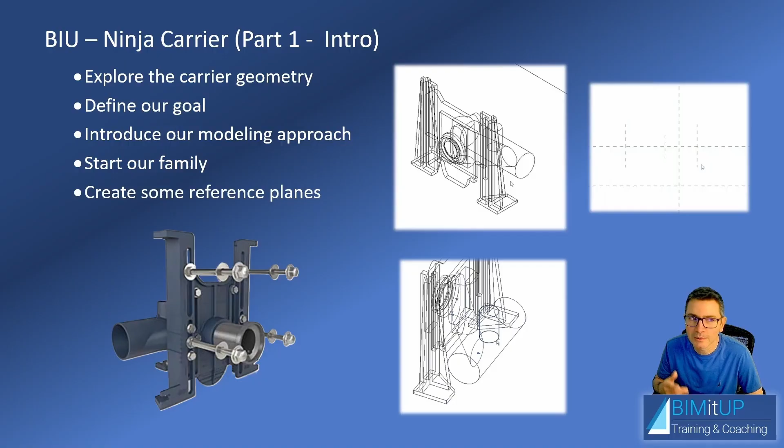This is the Ninja Carrier Part 1. So what are we going to do here? We're going to first explore the geometry of the carrier, then we're going to define our goal. What do we want from our carrier? Spoiler alert, we want it to be smart and practical. Then we're going to introduce our modeling approach. We're going to start our family, and as always, how do we start our family? By creating some reference planes. So see you in Revit.

Okay, so if you Google Zurn 1201 carrier, this is what you get. And this is what I'm going to use for my example. That's a single-handed carrier. I'm going to also do the back-to-back, but I'm going to start with this one because it's easier. So if you download this and load it into a project, you're going to get something like this, right? So you can see this carrier has a pretty complex geometry. So let's study it a little bit.

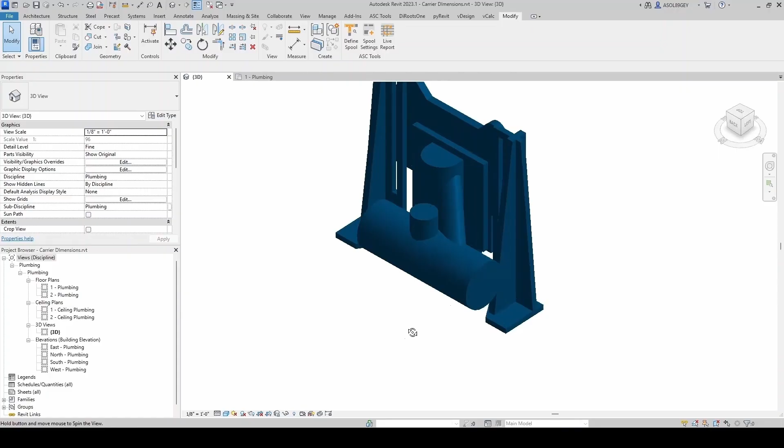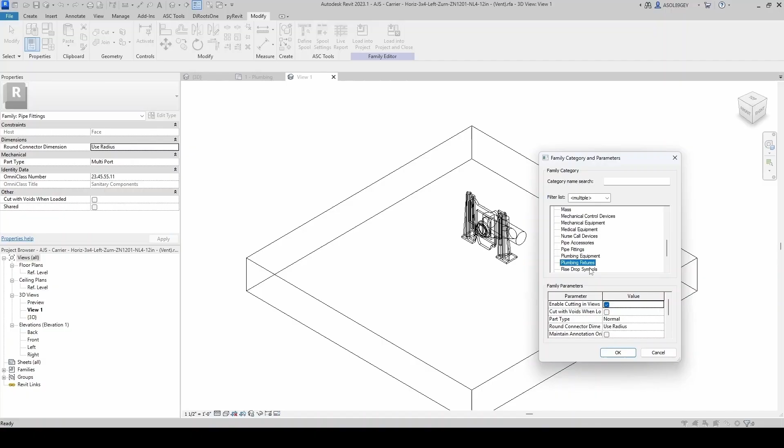I'm going to do Edit Family, right-click, Edit Family. And then you can see first that this is a face-based family. You can tell by this slab here that it's sitting on top of. You can double check by clicking here on Family Category and Parameters, and then you'll see that this host is face. By default, this family comes as a plumbing fixture. I think that's a total mistake, so I like to keep it as a pipe fitting.

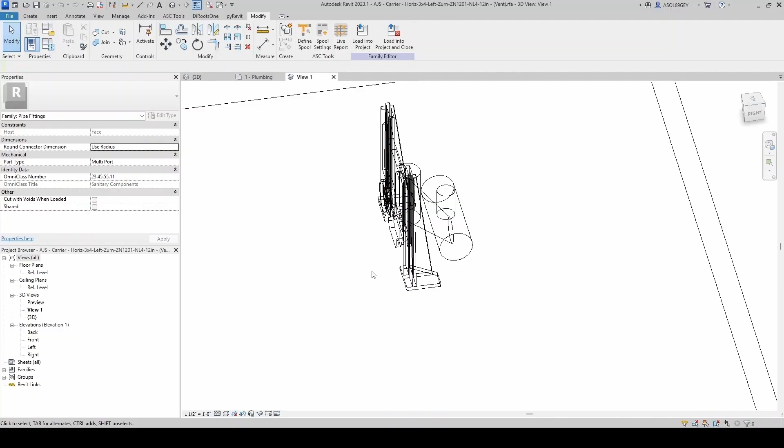Anyway, if we zoom in, you can see that the family, again, is very complex. If you click in here, for example, you can see that this is a blend, which is some solid that has a starting base different from an ending top, and then at the same time is reducing the distance from the contour. So it's pretty complex. So what I did is I'm going to simplify this, and I want a friendlier behavior. Okay. So the first thing I did was I checked on each one of these solids, and I made sure that each one of them was visible in plan, front, left, and also fine, medium, and coarse.

Once I did that, I went to my plan view and I defined a bunch of reference lines that I'm going to use as a template to create my reference planes when I build my own family. I try to use as few planes as possible, but enough planes that it gives me the flexibility that I want. Okay. What that means is I have this plane and this plane defining the insertion point of my family. This is probably the most important thing for me. I want this carrier to insert at the intersection of the waste inlet and outlet of the carrier and the waste inlet from the toilet. That's what I want. I want this point. So I define this plane and this plane.

Then I'm going to define a plane for the mounting plate exterior. So the toilet's going to be hung here on this side, right? So I want this plane to be defined. This is very important to me. And then the other plane that is extremely important is the exterior of the feet. So it's this plane right here, all right? And then from there, I'm going to build in a little bit and up a little bit for the feet of the carrier, okay? Then I measure a few distances.

You can see that I care about the distance from the center plane to the waste outlet, 9.1. The distance from the center plane to the waste inlet, 3.1. The distance from the horizontal center plane to the mounting plate exterior face is 6.6. Then the distance from the center plane to the exterior of the base or the feet. And then I build in a little bit from the feet from here to here, which is 1.9. Then from here to here, which is 0.6. Also from here to here, which is 4.5.

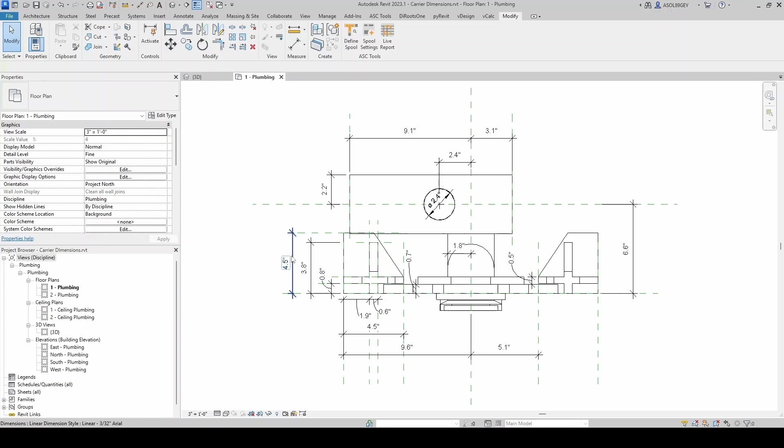And then finally, the depth of the feet, which is going to be from here to here, 4.5. So the width and the depth of the feet are the same, 4.5 and 4.5. Also, I'm going to go to my south elevation. And then I drew these two reference lines.

And I'll create a plane for the bottom of my support, the bottom of the feet. And then another plane for the top of the support. One of them is at 8 inches and the other one's at 8.8 inches up. Now I'm going to take a screenshot of this and I'm going to use it as a reference.

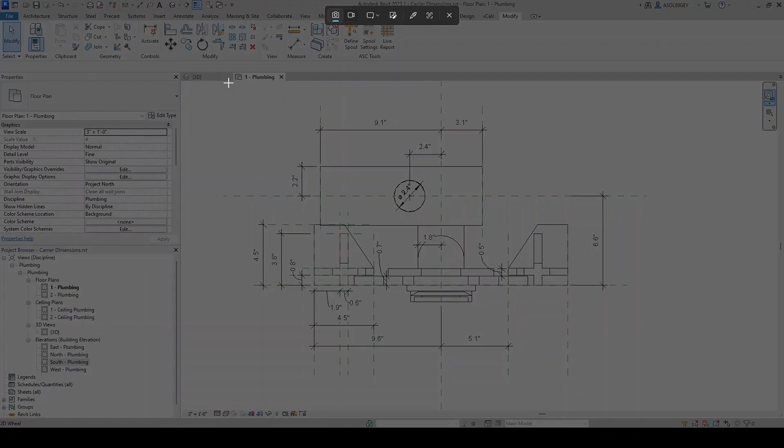And what I like to do is, as I start drafting my reference planes, I highlight them in my snip so that I keep track of them. And it's very important that you name your plane so you don't get confused.

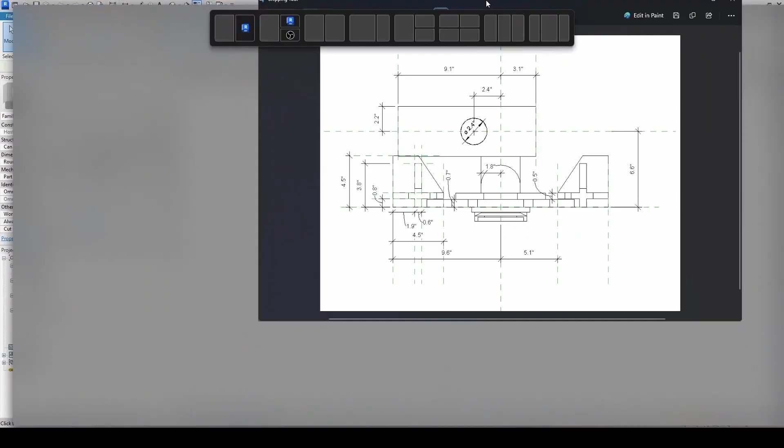And now I have my two planes by default. This one called Center, Left, Right, and this one called Center, Front, Back. So what I'm going to be doing on the other side of my screen is simply this. So I have this one, and I have this one. Right, so the ones I have solid, I know that I have created already. All right, so I'm good with those.

Let's go ahead and do create similar, and I'm gonna pick planes. I'm gonna make sure I lock it, and I'm gonna give this 9.1 inches of offset to this side. And I'm gonna shrink this because if not, I get confused. So I'm gonna get it just to the length that is useful to me, like this. Maybe a little bit more, maybe like that, right? And I'm gonna name this plane waste outlet.

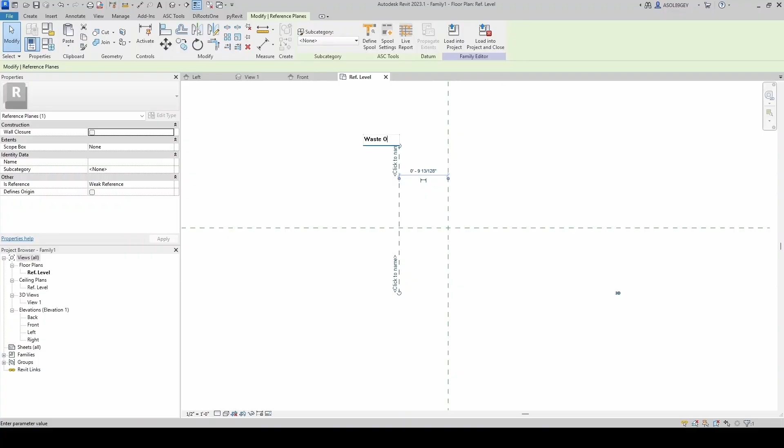I'm gonna get another plane, create similar. I'm picking the plane and giving that offset 2.4, I'm locking. And then this plane is gonna be even smaller because this is just for my vent. So that's good enough for me. I'm gonna call this one vent.

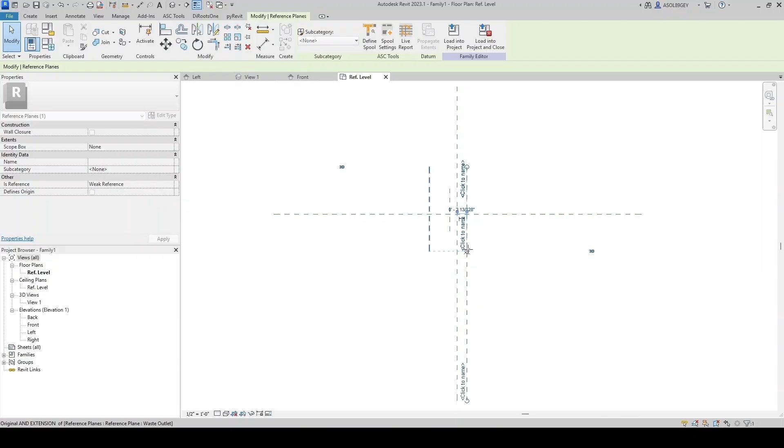I'm gonna do create similar one more time. I'm gonna pick lines, make sure I'm locking. And I'm gonna do 3.1 inches to the back. I'm gonna shrink this. And I'm gonna call this waste inlet.

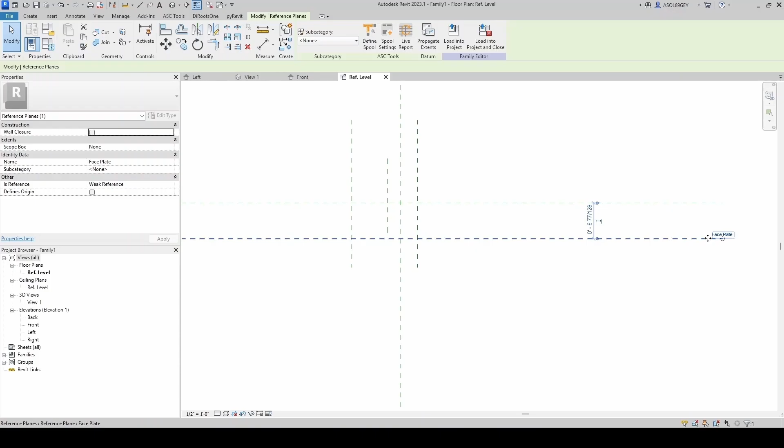Now I'm gonna click here, do create similar, then pick planes and measure 6.6 inches. And then I'm gonna click here, and I'm gonna name this one Face Plate. Now I know for sure that I can shrink this plane here. So let's shrink it a little bit because it's gonna get too confusing. Maybe something like that. And then the vent, I can shrink even more.

And then this one, I'm gonna do the same for the inlet that I did for the outlet, something like that. So I'm gonna highlight those planes that I have done on the right screen. And then before this starts getting too confusing, I'm gonna start creating some solids.